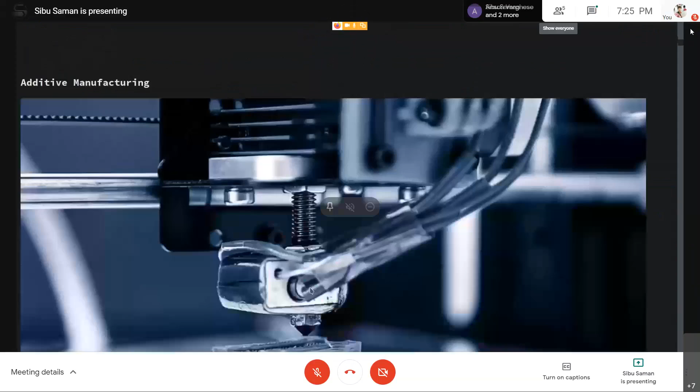Hello, can you hear me? Yes, sir. Audible. And you can see my screen, right? You share it. Okay. Please. Okay, let me know when you share it. Is it visible? Can you please tell me the WebEx? Okay, now can you see? Yes, it's visible. Okay. Let me just check one more because in this. So let me play a sample video. Can you see the video properly, or is it not good? Yes, sir. We can see the video.

Also, you need to enable the audio. No, no, there is no audio. There is no audio. Okay. It's just the video. Okay. And how about the attendees? Like, because we are sharing the screen and then resharing it. So. It's visible, sir. It's clear. Okay, okay then.

I work as a consultant for FAB Foundation. It's an international NGO for supporting installation and training in Fab Labs. So I hope you know what Fab Labs are. They are basically a makerspace for digital prototyping. In Kerala, we have 2 big Fab Labs, and we have about 20 mini Fab Labs across the state. So I hope most of the students in Kerala at least know what the Fab Lab is.

Okay, and yeah, so our session is about 3D printing today, and its application in COVID-19. And since the theme of the event is sustainable future, I will be talking a little bit about that too. Okay, so first I will

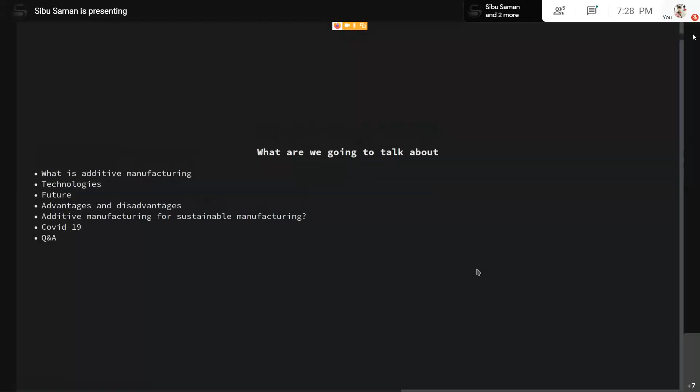So we are going to talk a little bit about additive manufacturing. Then, not in very much detail because we don't have much time, I will briefly cover the most important technologies for 3D printing. Then we will spend a few minutes on where this technology is going to lead us in the future. We will also talk about advantages and disadvantages of additive manufacturing compared to traditional manufacturing, which is subtractive. And we will talk about sustainable manufacturing and applications of additive manufacturing in COVID-19.

Yeah, let's talk about additive manufacturing. While talking about additive manufacturing, we first have to define what it is. This is the classical manufacturing method, which is by subtraction. We remove material. We start with a big block and keep on removing material until we get the final object. So as you can see, this is quite wasteful. We are removing a lot of material. It's fast for one object, but if you want to make thousands or tens of thousands, this is not the method we use. In fact, even 3D printing is not the method we use for mass production, right? We would be using something like injection molding for mass production.

But as you can see, this is wasting a lot of material, especially when you are talking about big, expensive engineering materials, for example titanium for the aerospace industry. We would be starting with a block of metal which weighs hundreds of kilos, which is going to cost a fortune. And then we are going to remove most of it, like 90%, and send it for recycling. That's not ideal, right? We can start from nothing and build it up. This is what 3D printing is about.

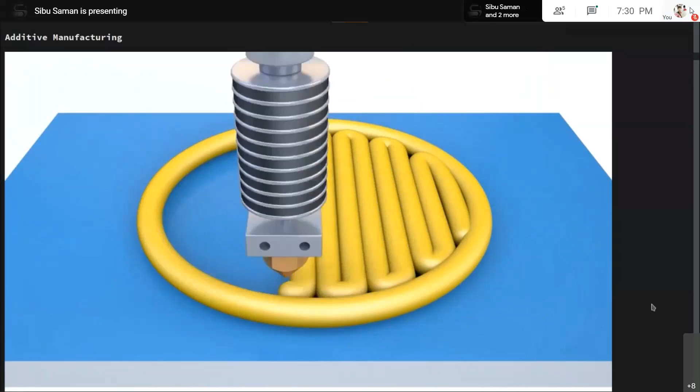So the basic process is you start with an empty bed, and then you keep on depositing material layer by layer. There are many ways. You can deposit by layer, and there are recent technologies in which you can build the entire object in one go, which I will talk about later. And this is what we call fused deposition modeling. We start with a plastic material, heat it to melt it, and then extrude it. The extruder moves in XYZ coordinates, and like this we deposit each layer, and the next layer is built on top of it and adheres to the previous layer. Like this we build each layer and complete the object. So this is the basic idea of 3D printing.

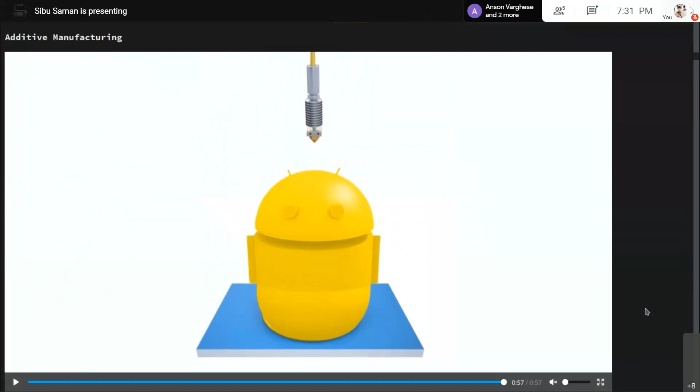So this comes from printing. When we talk about printing, we know what normal printing is, like paper printing. Imagine that the ink on the paper has a thickness, say 0.1 mm or 0.5 mm, and when we stack hundreds and thousands of such layers, we end up with an object which is centimeters or 50 centimeters tall. So that's the basic idea. In fact, one of the 3D printing technologies is actually laminated paper. I will show you one of the videos for that.

Okay, now, how do we start with the design? Obviously you need a design in the computer. You have to design a 3D object in the computer, and then the next step is slicing. Even though it's funny, it's something that is very easy to understand. Each slice of bread is a thin slice of the final bread loaf, right? Each slice has a thickness, and so does the slicer software. So first, suppose we design the model of the bread in the computer, then we slice it, stick each of the slices together, and slowly build up the final shape of the bread. So I will show you one example.

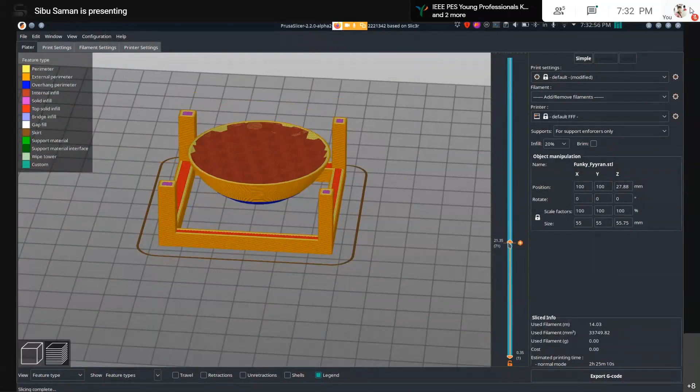With a ball inside a cube. Is that right? Yes. Okay. So this is a design. So basically, a spherical ball inside a cubical structure. So, as you can see, traditionally, this is very difficult to make out of a solid block. I mean, it's very difficult to get into each and every corner and remove the material.

Maybe you can do it by positioning the material in 5 or 6 different ways and attacking it from different angles. Maybe it's possible. Okay. Now, in 3D printing, what we do is we slice it into many pieces. So this is a slicer software. There are many software. For example, this is one web-based slicer. Now this is a Prusa desktop slicer.

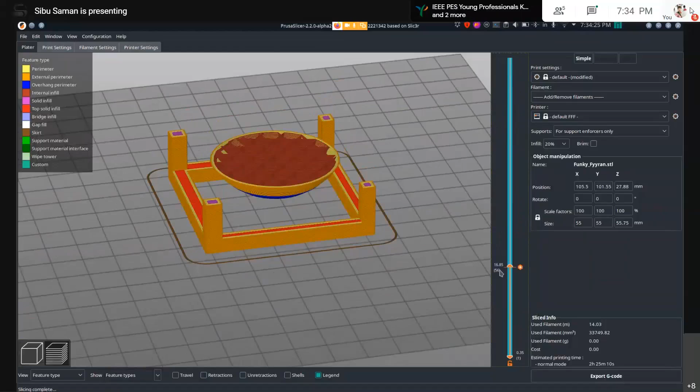So let's slice it, and then you will see that these are each of the layers. So this is how it will start building. So this is the first layer, and then it will print the second layer, and then the third, and then the fourth, and it will slowly build. So this is how we are going to build it. Okay, as you can see, right here, let's say right here. So all the material you can see. Okay, this is the first layer.

It's going to build on the base plate, which is going to be a heated piece of glass or aluminum or something, and then the second layer, and then the third layer. So every other layer you can see is built on top of the previous layer, except for this one, right here. So you can see that a layer is appearing in the middle of nowhere, like it's air. You see there is nothing under this layer.

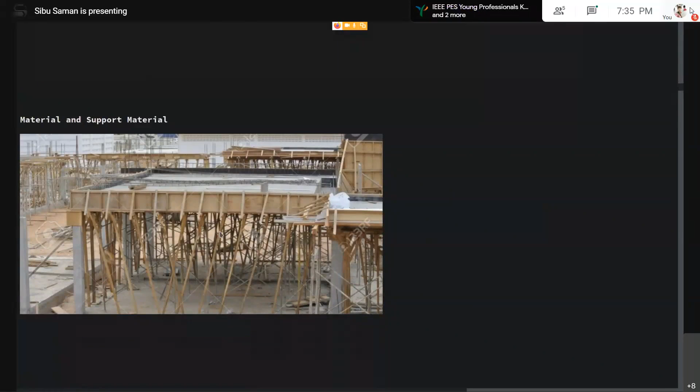So this is where we need something called support material. Okay, so going into the construction field, we know what support and support material is. When we do concrete work, when we do the roof slab, we need support material, right? We will do formwork for the concrete, because we cannot pour concrete in the middle of nowhere; it will just fall down. So in 3D printing, similar.

So what we do is we will go here. By the way, I'm showing this because at the end you will need this when you design your own object and send it to 3D printing. So let's say everywhere, and then I will regenerate it. And then you will see that a new green layer appears, and this is not a layer. You can see the other layers are very dense, but this new layer is not that dense.

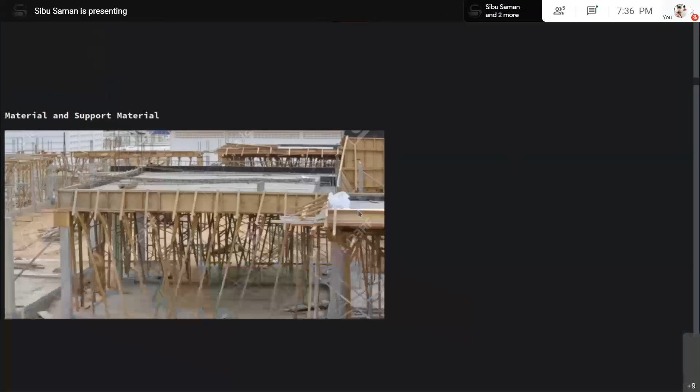So it builds a scaffolding on which the spherical object is then printed. So what happens is, since there is a scaffolding, this spherical object is not going to fall anywhere. And this is also going to give support for this vertical beam, horizontal beam over here. Okay, so let's move up. And now let's talk briefly about the technologies available.

So the most common technology we are familiar with is extrusion. So basically we will extrude material. Okay, and we will extrude maybe plastic. So this is one render where you will start with a plastic material. It could be PLA, it could be ABS, it could be nylon. There are many materials. It could be TPU if you want flexible material. So there are many options.

So this is one animation from Stratasys. Stratasys is a big company, one of the companies that was very early into 3D printing. So as you can see, this is depositing the material and then the support material. You can see that there are two materials with two different colors. This white is support material and the black is actually the object we are printing. This is the one we need, and we will later remove the white portion.

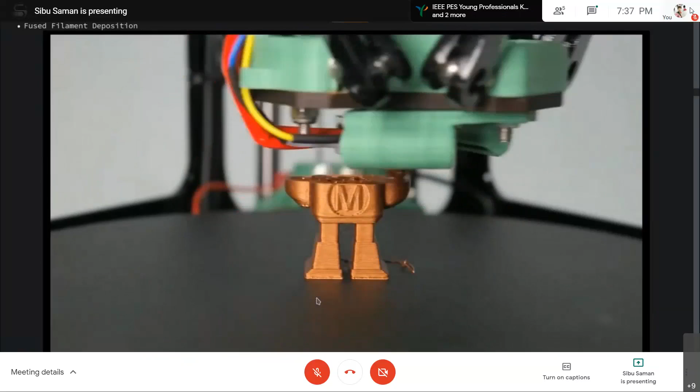So you can see that we are removing support material, we do some post processing, and we will end up with a very nice material. And now I will show you another time lapse. It's another render, similar technology.

And now when we talk about 3D printing, we usually talk about plastics and sometimes metal, sometimes ceramic, sometimes concrete. So this is another material which we don't usually consider for 3D printing. This is glass. You can actually print in molten glass also.

Technology is the same, just the machine is going to be a bit more complicated to handle the heat of the glass. So this is the same technology. We are going to print, deposit the glass, molten glass, layer by layer to develop the final object.

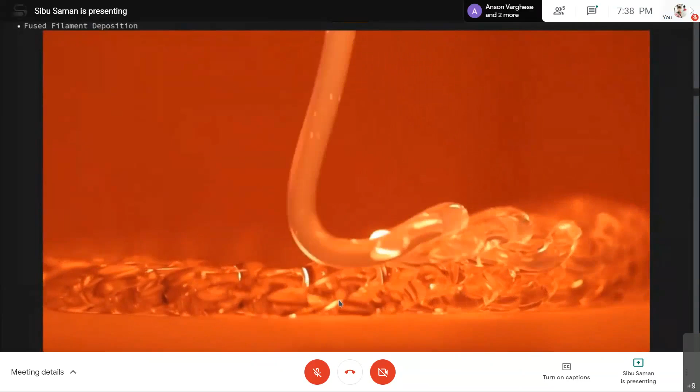So when we talk about the history of 3D printing, I don't want to spend a lot of time on it. This is not a history lesson, and it's not going to be very interesting. But we all think that 3D printing is a new technology which is revolutionary, but the fact is that 3D printing has been here for a long while, at least since the 1970s.

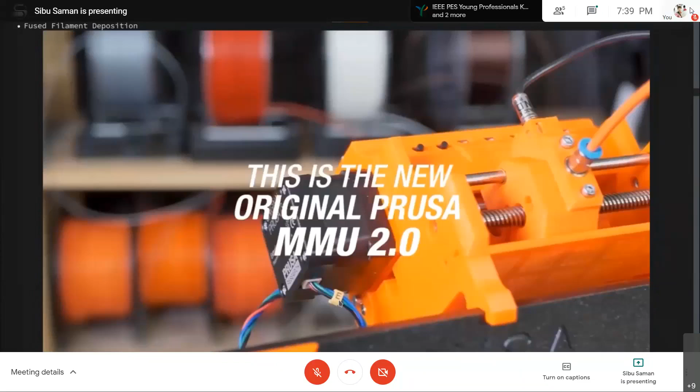The problem was that all the technology was proprietary with license to only a few companies. They weren't ready to share with anyone. And recently, since around the 2000s, many of the patents got expired. And then a lot of private researchers and independent universities could start working on the 3D printer, researching and developing and creating new technology, new machines. So this is what happened.

So 3D printing is not a new technology as we see. Some of the methods are actually new, but the technology itself is very old, we just didn't have access to it. It was only accessible through multi-million dollar machines from big corporate companies.

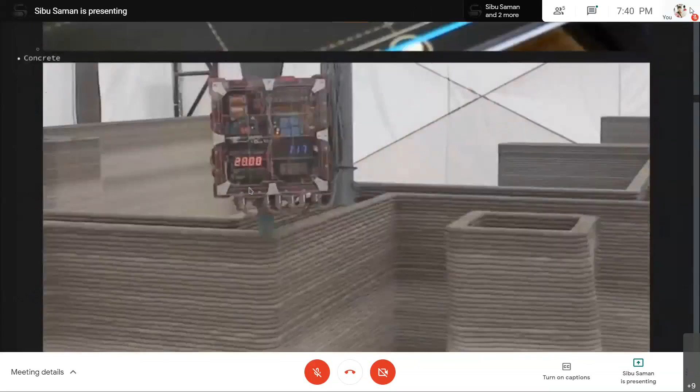So this is another extrusion based 3D printer. As you can see, this is a concrete 3D printer. This can be used to make housing colonies, houses, buildings, and other structures. And this is just another video. He's building a statue of himself, and the sand here is the support material. Similar to the one before, where they were using a different type of plastic as a support material, here concrete is the main printing material, and the sand is the support material, which can be easily removed later on.

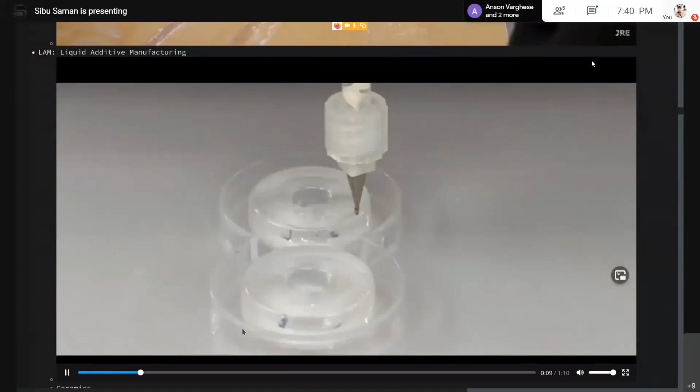Okay, and another technology is liquid additive manufacturing. It's similar to the one before, but instead of a solid object which we turn into liquid, we start with a liquid. So this is a silicone material, this is ceramic material, but this is not hardened immediately. The silicone we will have to vulcanize, and the ceramic we will have to bake in an oven for full strength. Okay, and then moving ahead.

So now we are going into a different type of technology. Remember I told you this is not exactly 3D printing in a different sense. You can see that at any given instant, we are processing only one pixel, one dot, and that is one dimension, right? We are not creating one line at a moment. At any given instant, we are only generating one dot. So we could say that this is

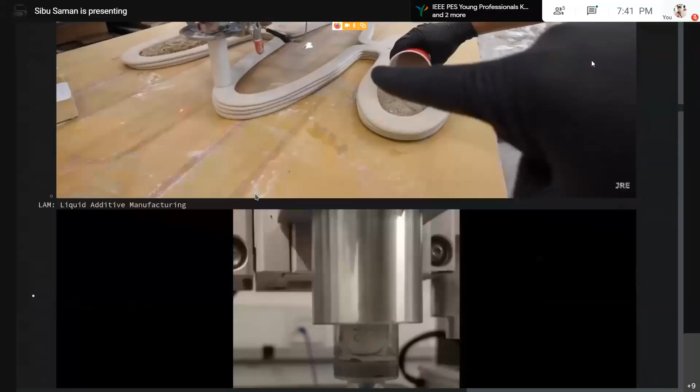one-dimensional printing. Now we will go into something called PolyJet, and this is actually what I would say is 2D printing. The reason is it's very similar to an inkjet printer, except that we are depositing a lot of ink, which has thickness. Basically the head is that of an inkjet printer, so the technology is the same. You can see that it's spraying droplets, and each drop has a thickness. The ink is a UV curable resin.

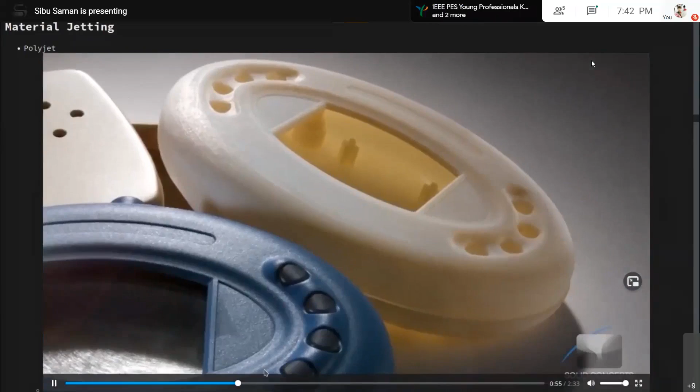So they will deposit a layer, and when they pass, you will see there is a blue light, which is actually UV light. It will cure that layer immediately, and then the next layer will be built on top of it. The reason why I am saying that this is two-dimensional printing is we are not processing one dot at a time. In fact, we are processing a line at a time.

So this is actually one-dimensional printing. Sorry, the one before I made a mistake. The one before with a dot would be zero-dimensional printing, and now we reached one-dimensional printing. So we have a line. We will be printing a line at a time.

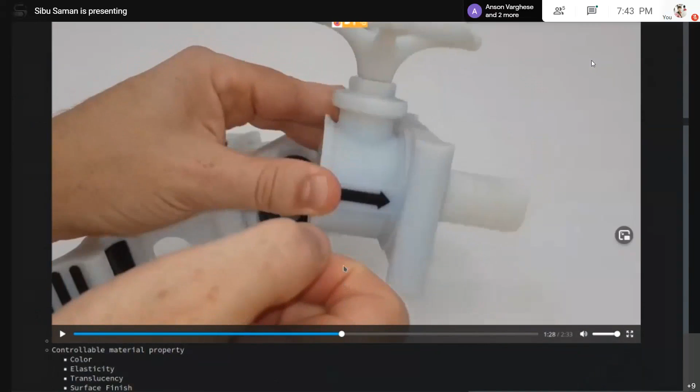So this technology is very versatile. Since we are using liquid resins, we can have different types of resins. We can have flexible resin, we can have very rigid resin, we can mix in colors. So this technology can actually print in many different colors. You can have flexible, rigid, transparent, or conductive materials. You can modify the property as you wish.

It's a bit expensive. The machines are a bit expensive. For example, the printer we commonly see, this one, you can buy for around 50,000 rupees, or under 1,000 US dollars. These machines will go up to $50,000. In fact, one of the machines from Stratasys is about $500,000. So these are very expensive machines, and it doesn't make sense for the maker space to have one.

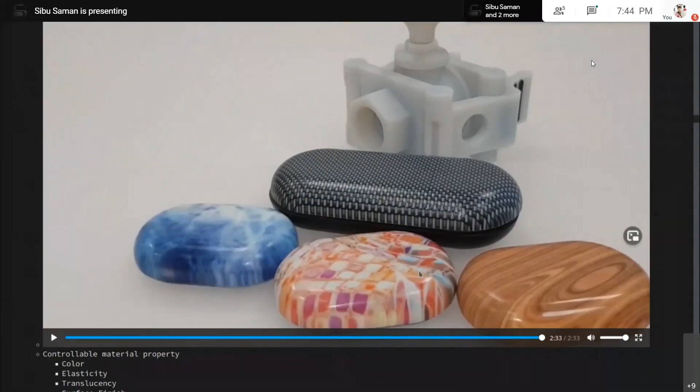But it can do a lot of things. It serves the medical industry, it serves prototyping for big companies and all. So there are many uses for this. In fact, you can see this valve here is printed as such with a rubber gasket. You don't need to assemble it. It's printed, you take it out of the printer, do some post processing, clean it, and then you get a fully functional part, with all the movable parts, all the seals, everything. So that's something very interesting about this machine.

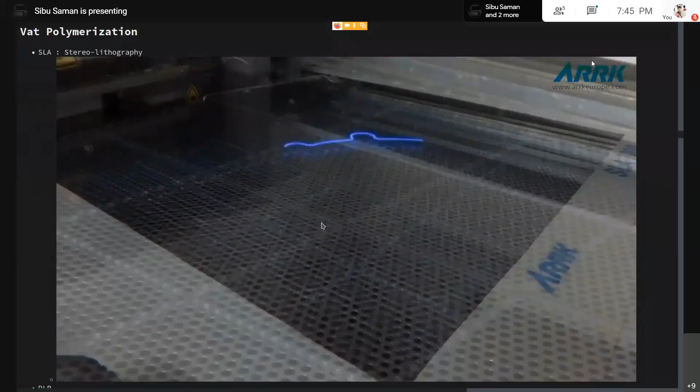Now, the next tech is vat polymerization. This is where we actually get into 2D printing. Not at the moment, but I'll tell you. Vat polymerization is similar in the sense that it uses the same material as before, a photoresin which reacts to UV. When you expose it to UV light, it hardens. So this is a bath of UV resin, and we expose it selectively, and then the bed goes down. A new layer of resin appears on top, and then it is exposed again. So slowly we build each layer.

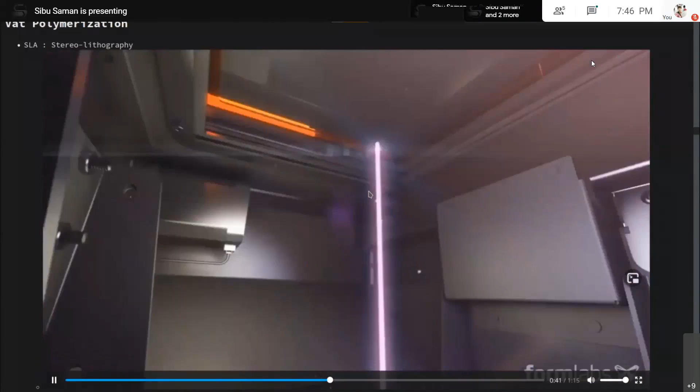And now this is a small desktop printer, around $3,000 US, from a company called Formlabs, and you can see what happens. There is a laser beam, and scanning using 2 galvos in the X and Y direction, and then the bed moves. In the previous machine, it was going down into the resin. Here it's going up. That's the only difference. Basically the process is the same. You expose one layer, build one layer, and then the build platform lifts up to bring new uncured resin to the bottom, and then it's exposed again.

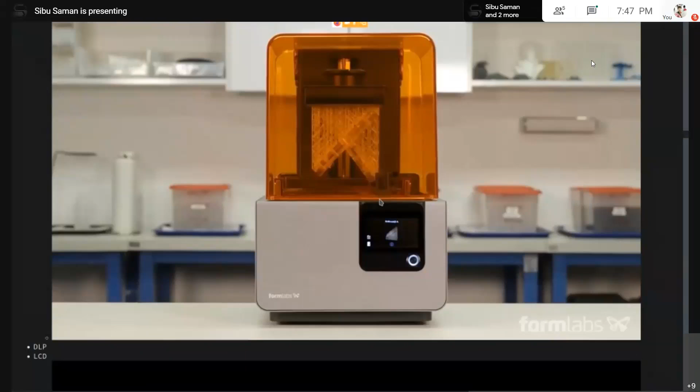All this webbing you see is support material. You can remove it later. So this is called SLA, the stereolithography process. And as you can see, this is very slow. Again, this is one dimension, or zero dimension. You are processing one dot at a time.

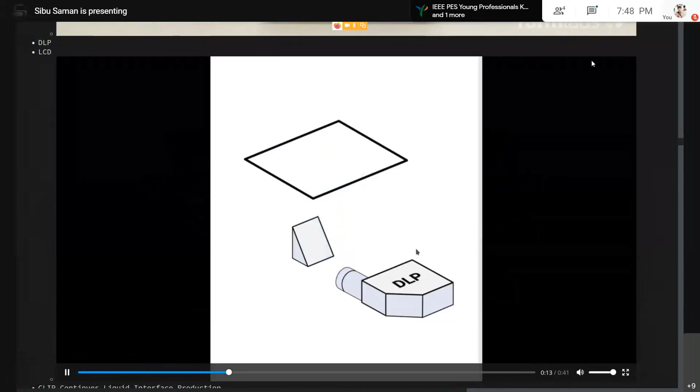Now let's see this one. The one we saw just before uses a laser, but you can also do it using LCD and DLP technology. Instead of generating the layer line by line, we generate the entire layer at once. It's similar to projector technology. In fact, it's actually a projector inside, but instead of visible light, we use UV light. DLP exposes the entire layer, just like a DLP projector, and LCD also exposes the entire layer, just like an LCD projector. A DLP projector uses a micro mirror device, and LCD, as the name implies, just uses an LCD.

Laser machines have very high resolution. DLP has okay resolution, high enough for most common jobs, but it's kind of expensive. LCD is very cheap. LCD panels are very cheap, but they don't last very long. The material inside the LCD is very sensitive to UV light itself, so it's not going to last very long.

So it's similar to the DLP or LCD projector. In fact, they use a DLP, but the difference is in how it is being printed. The difference is in the chemistry. So you can see this is very, very fast. This is only 2 minutes, 3 seconds. Now this 3 minutes. It's very fast.

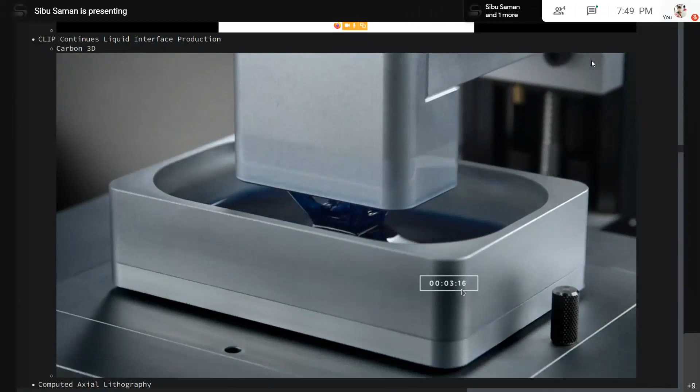So I'm not going into depth of this technology. It's called continuous liquid interface production. You can search about it. It's marketed by a company called Carbon 3D. So basically, it uses a special resin which is sensitive to UV. At the same time, it will not react in presence of oxygen. So they have a special membrane underneath which is permeable to oxygen. So when they expose it to UV, it's not going to cure.

So like you can see here, the build platform and the tray in which the resin is kept are actually in very close contact. So when you expose the resin to the UV, it will adhere to the layer before and also the tray. So you have to lift it up and then you have to expose it to the new uncured resin. That's a problem.

Since the membrane is permeable to oxygen, the resin very close to the membrane is not going to cure even when exposed to UV. That's how they do this printing very fast, because they can continuously lift the print, and as they lift, the new material will be seeping into the cavity.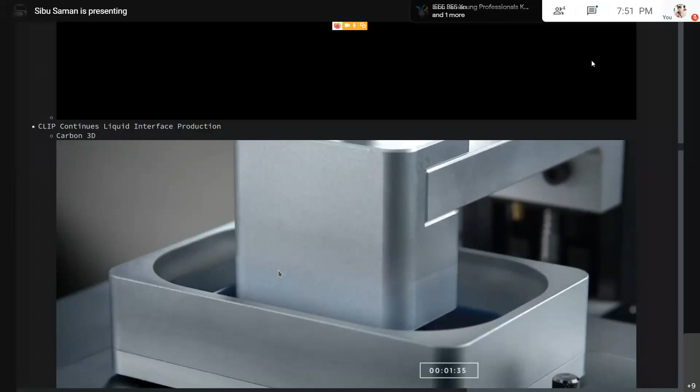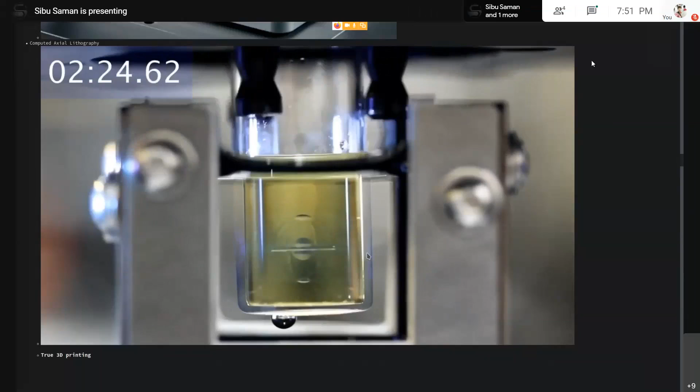Now, we have seen 0 dimension, 1 dimension, and 2 dimension. Now this is the real 3-dimension printing. Okay, so this is similar to a CT scan or an MRI scan. So this is very advanced technology. This is not very easy to understand with common sense. So as you can see, the entire object is getting developed in 3 dimension in real time.

I mean, we are not generating one layer at a time. We are not generating one pixel at a time. We are generating the entire object at once. So this is like the replicator in Star Trek. The entire thing is getting exposed and developed at a single go. This is very interesting, as you can even have material inside. So this is a screwdriver.

So you can see that this object is developed all at once. And this is a screwdriver with a metallic bit inside, and the material is being printed around it all at once. So this is a computational process.

What we do is, this is similar to the previous technology, but we have a projector and a photocurable resin. In fact, the photocurable resin is very high viscosity, and the hardened object is going to be of similar density to the liquid. So when the exposed resin hardens and the print develops, it's just going to stay in the middle of the liquid, and it's not going to fall.

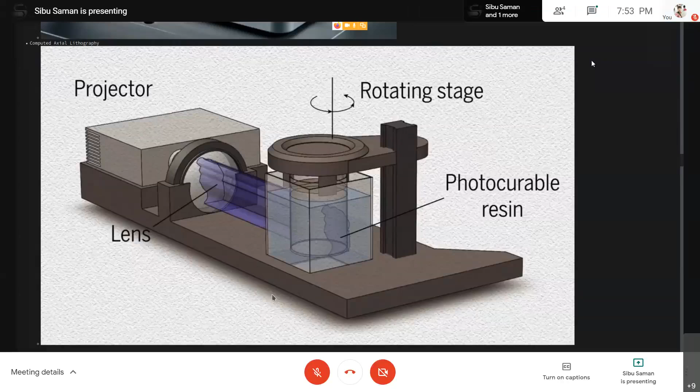So yeah, you can see this is printed in the middle of the liquid, and it doesn't need any support material because it's not going to fall. It's the same liquid, same density. So the idea is, we are going to expose it, rotate it, and expose it with the different images as viewed from the sides. So it's a somewhat complicated computational process. And so this is the real 3D printing. We are printing the whole object, in 3 dimensions, at once.

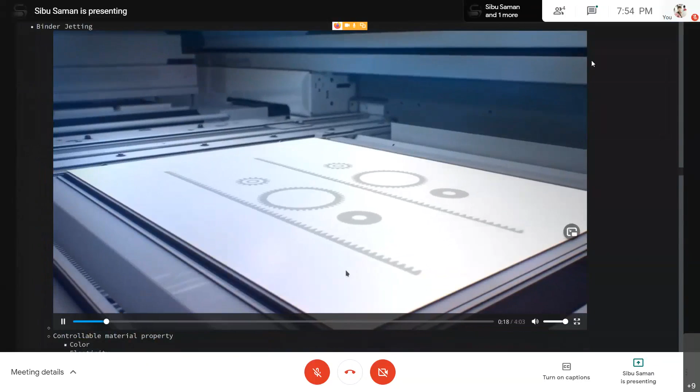Okay, now another technology is, we start with a powder, and then we spray material which will glue the powder together. We can print metal, plastics, nylon, ceramics, we can even print sand, a lot of materials using this technology. So we start with a bed of powder, a layer of powder, and it's similar to the polyjet printer, but instead of the material, we are actually spraying some kind of glue, which will bind the powder.

And similar to polyjet, we can have a lot of control over the material property. So there are two materials, you can see: fusing agent and detailing agent. Using these two, especially the detailing agent, we can control different properties like color, elasticity, translucency. We can even have a conductive detailing agent, so we can have a conductive final object.

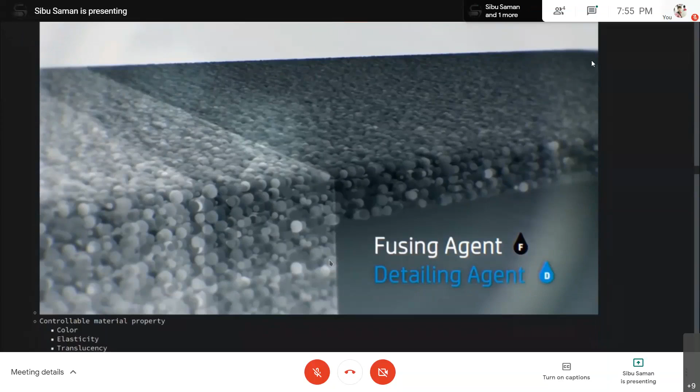And this is another machine which is actually printing in sand using sodium silicate. Sodium silicate is liquid. We commonly call it water glass. And when we expose it to carbon dioxide, it becomes solid. It's just going to be silica. Okay, so you can see this is a mold for casting metal. So the mold is actually printed.

Sorry, the rest of the video is not working. Sorry for that.

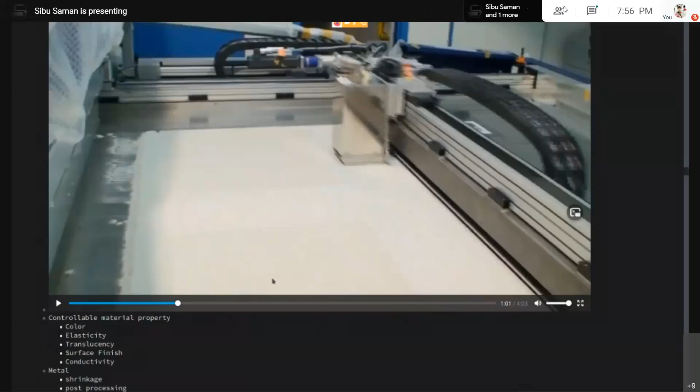So this is the mold for the metal casting, and this is commonly used by automobile manufacturers. This is how they are going to cast the engine blocks and everything.

Okay, and also this technology can be used for printing metal. So how they do it is you start with a metallic powder, and then you print a binding material, which could be starch or something. But then this object is not going to be very hard, so you have to put it in an oven, in a furnace, for either sintering, or you have to impregnate it with

another metallic alloy. For example, if you are printing in steel, you can impregnate it with bronze or brass. So this brass material will diffuse into the print. It will adhere. It will make the final object very hard.

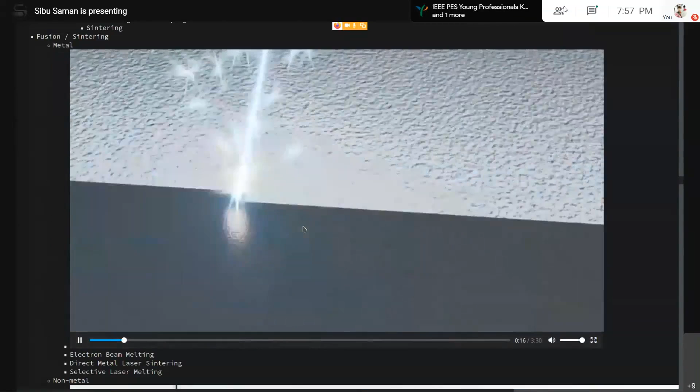This is another technology. What you are seeing over here is a metallic powder, and instead of jetting a material like a glue, there are two different ways. You can either use laser or you can use electron beam. So we use this electron beam or laser to sinter the material or melt the material and bond it together.

So depending on whether you use electron beam or laser, or whether you are melting the material or just sintering it, there are three different technologies: electron beam melting, direct metal laser sintering, and selective laser melting. So there are three ways you can do it. All three technologies will look almost the same. There are just some minor differences.

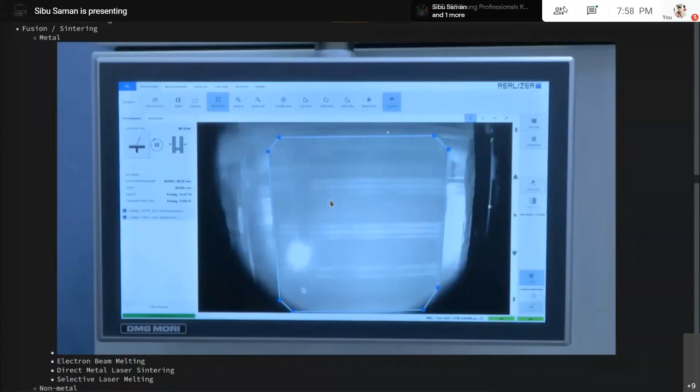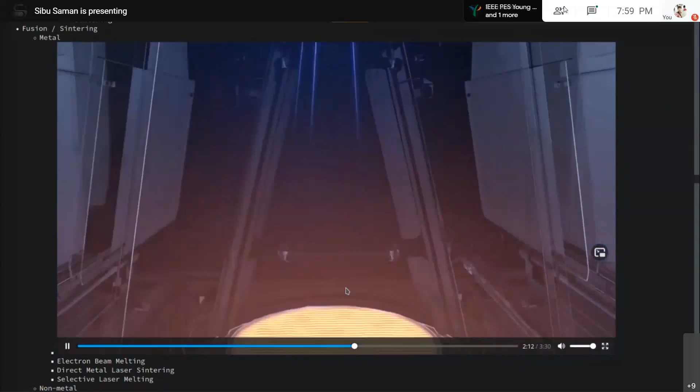Now this is selective laser melting, and as you can see, this is very similar to selective laser sintering. There is not much difference here. And the electron beam process is slightly different. The bed and everything will look the same. You use the electron beam to melt the metallic powder and fuse it together. And this is done under high vacuum and inert atmosphere.

You can actually build a lot of very complicated material using this technology. You can see there are very complicated structures, which are very hard to create using traditional manufacturing processes like CNC milling or machining. Complicated material designs you can actually print.

So this is another process, but instead of metal, it uses plastics. This is a sample created by one of the affordable laser sintering machines, which is called Fuse 1 from Formlabs. They use nylon material and they use a laser to selectively fuse the material.

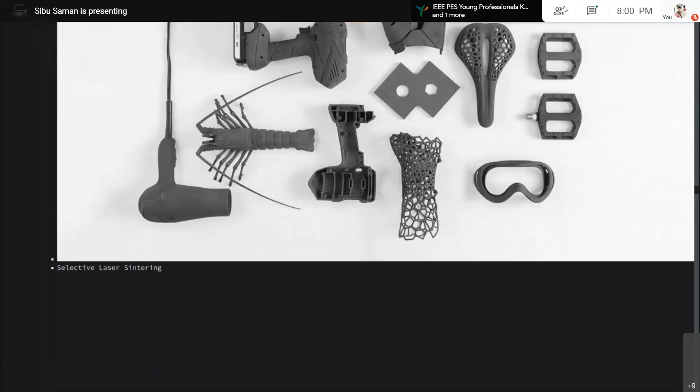And now we'll talk about a few other technologies. When we talk about printing, we usually don't consider this as 3D printing. But in fact, this is also 3D printing. It's just that instead of concrete, we are using bricks to create material. So this is also kind of 3D printing. You can consider it as 3D printing.

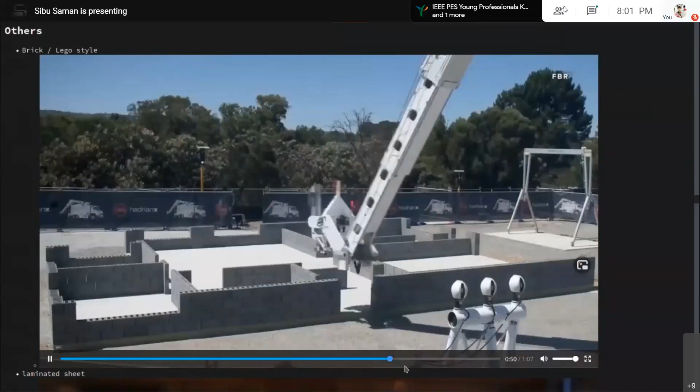This is an animation. And this is the real machine. It's building a house brick by brick. So even though we don't consider this a 3D printer, it actually is.

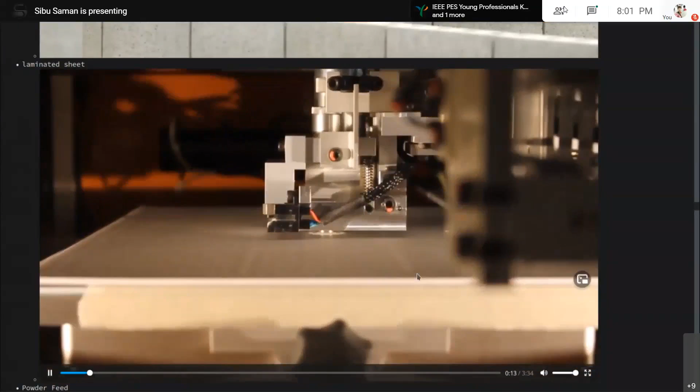And remember, I talked about laminated paper. So this is a printer. It creates the object paper by paper. It puts down a paper, bonds it, and now it's going to cut it. It binds each paper to the previous one using a particular pattern of glue, cuts the material wherever you don't want it, and then the next layer is built on top of it. So it's paper by paper, and this is the final object.

And we remove everything, and you see that this is in color, and the reason is that since it is paper, along with the glue, you can also have a normal inkjet head, which can print the color you want.

And this is another laminated sheet process. It's called ultrasonic consolidation. Instead of paper, we use metallic sheets, and we bond the metallic sheets using ultrasonics.

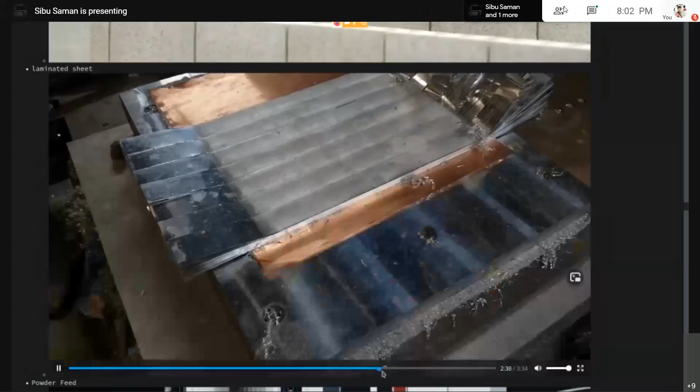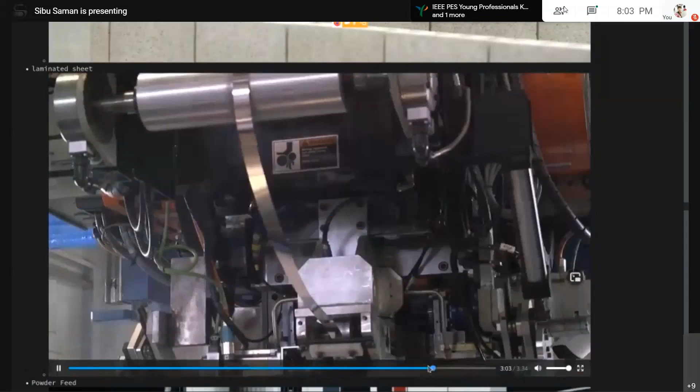So you can see that each sheet of metal is bonded to the previous one using ultrasonic energy. It basically disturbs the oxide layer, and a solid adhesion forms. Other than that, this is very similar to the previous technology, printing using paper. Just the method used for adhering the metal is slightly different. That's all. The technology is basically the same.

And now this is a different kind of 3D printing. What you see here is a jet of metallic powder. We inject a jet of metallic powder into a laser, and it immediately melts and fuses at the spot. It's similar. I mean, except the method for creating the molten metal, this is very similar to fused deposition modeling from 3D printing.

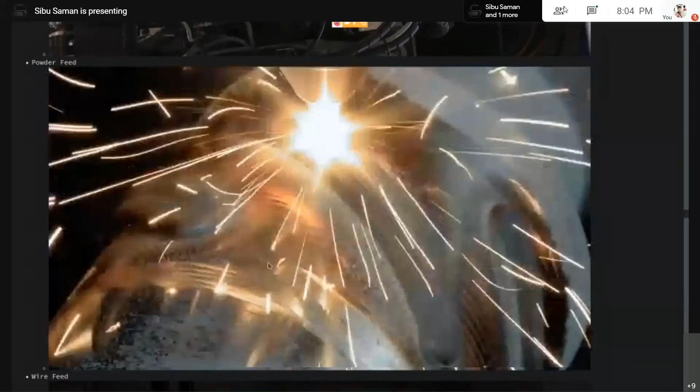So this kind of printer is what we call a hybrid machine. It will have traditional machining capability as well as 3D printing capability. So it creates the object, and then it does the final surface machining. We don't have to start with a big block of material.

As you see, the material removal is very minimal. The material wastage is very minimal. We are not starting with a big block. We are actually approximately printing the rough material, and then removing only maybe 10% of the material.

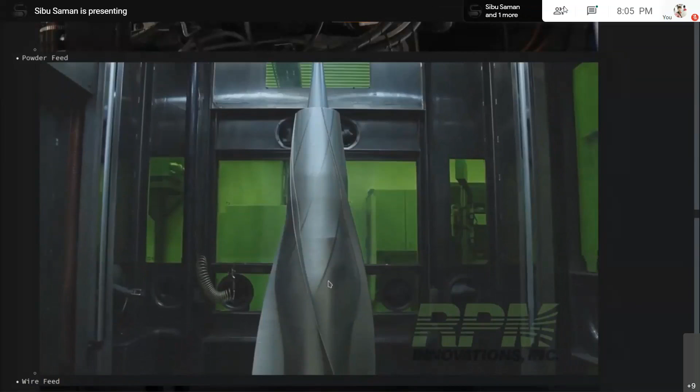This is another version of it. It's actually printing honeycomb triangular patterns. It created a shell and it created this honeycomb pattern around it for external strength. I will talk about this later. This has an interesting property.

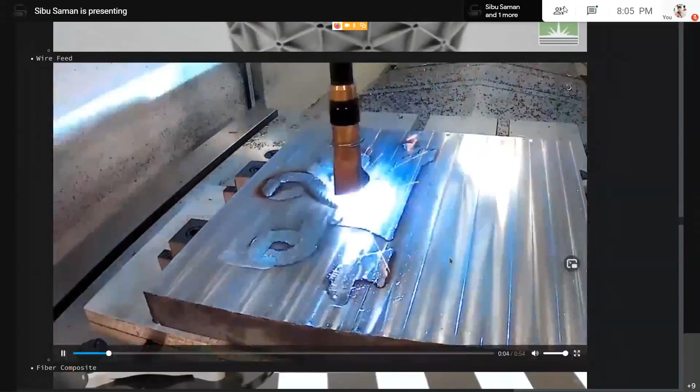And this is another technology. As you can see, this is very similar to welding. It's just a MIG welding machine on a 3-axis CNC machine. So it's generating the final 3D part layer by layer using the MIG welding torch, and then the final finishing process is going on.

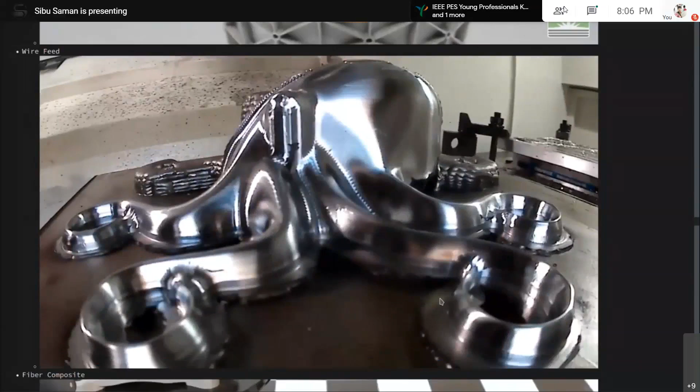So as you can see, there are many different ways of 3D printing. It's not something very new or a very advanced technology. All these things are, you can see, very simple technology. We had these technologies before. We didn't have the right to use them, because the rights and the patents were with the corporates. That's the only difference.

And this is another method which creates plastic fiber composite materials. This is glass fiber, and it's extruding glass fiber along with the UV curable resin, and it's bonding right then, and it's creating the final part.

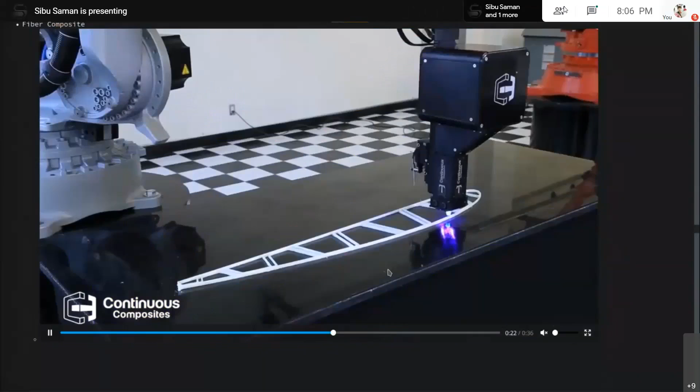So these are all the different types of technologies for 3D printing, and there are even more technologies. I'm not going to cover all of them in detail. This is just the general introduction to the available 3D printing technologies. So any doubts so far before going ahead?

Hello. Hello, sir. Sir, there was a question in the chat box. I'll read it out. Here's a question from Mr. Jayakrishnan. What material would you recommend for watertight enclosures which need to withstand pressure of a couple of bars?

That question is a bit complicated in the sense that it's not just dependent on the material, it's also dependent on the technology we are using to print it. If you are using a traditional 3D printer like an Ultimaker, one of the fused deposition, plastic filament based ones, it's very difficult to make it watertight. You will have to print it, and then coat it with some kind of epoxy or polyurethane based resin to make it watertight. By nature, that printing technology is porous.

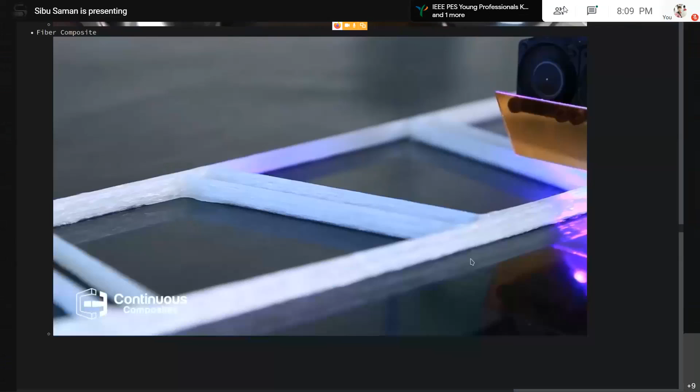Basically, you will get software with each printer. Each printer will use its own software. And there are a few 3D printers which use a common software. So either you can use, okay, let me post it in the chat itself. Here.

You can use either Ultimaker Cura or, so the software I used is Slic3r slicer. That's the software I use for slicing it. And depending on which printer you have, you will have different software.

And in fact, if you just want to try it out, you can use this particular software. I will also post the link to this in the chat. This is a web-based slicer software.

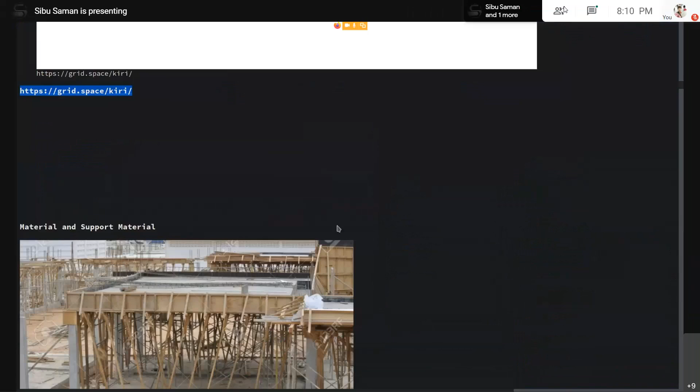Yes, sure. So there's one more question from Avinash. In normal 3D printing, the layers are visible after finishing the project and the finish is not 100% good. Is there any technology to print the object without that visibility of the layer while printing itself?

One of the options is to make the individual layers very thin, and then you can slightly sand it or buff it, or there are a few different post-processing methods. For example, you can reheat it. If you are printing in a normal 3D printer, you can put this object, cover it with fine sand, and then heat it to about 200 degrees. Then these layers will disappear.

And if you are printing in ABS, you can use what is called an acetone bath, and then also you can make the layers invisible. But another thing you can do is, if you are using a resin 3D printer, usually the resolution is really high, so you won't see them.

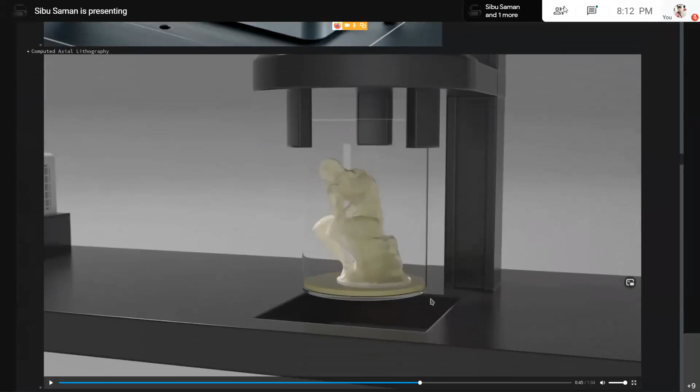The printer over here, what I told you is the real 3D printer. It's called computed axial lithography. The technology is not yet commercially available, but the final object from this printer doesn't have these layers, because we are not printing in layers. We are building the entire object at once. So yeah, this is the only technology right now which doesn't have the layers.

Before moving ahead. No, sir, no. Hello? You may continue.

Okay, so now let's see what's going to happen in the future with 3D printing. I'm not an expert in this. What I'm going to say from now onwards is basically my opinions and my views based on the experience I have. So you have to take it with a grain of salt.

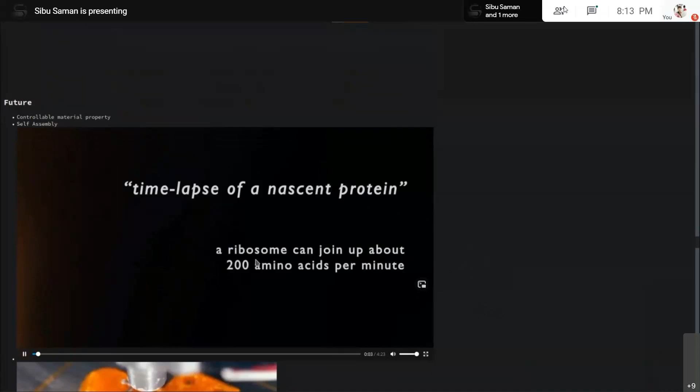So this is not a 3D print. This is not a human-made 3D printer. This is in nature, and this is how we were created. We were 3D printed using proteins, and the building blocks for these proteins were amino acids. There are a couple of types of amino acids, and they were printed using ribosomes. So you can say that we were actually 3D printed like this.

The interesting fact is that even though every protein is created from basically 20 to 24 amino acids, every protein is different. It does a completely different thing, and the functionality of these proteins comes from the shape of the protein.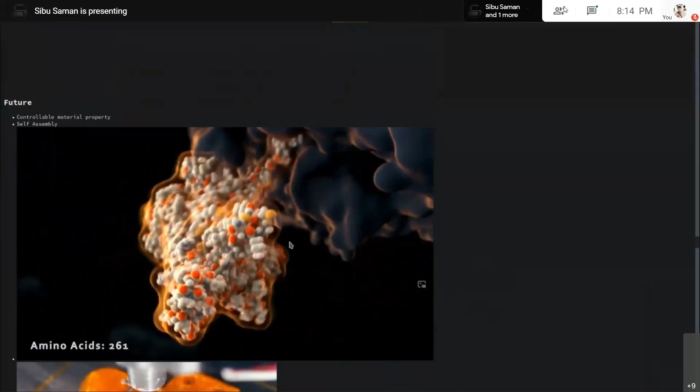Okay, and the reason I'm showing you is this is another one we are creating. What we are trying to do in the future, I think, is mimic nature in 3D printing. We are actually utilizing the material properties, which we can call a fourth dimension. So along with the three physical dimensions, the material property is the fourth dimension.

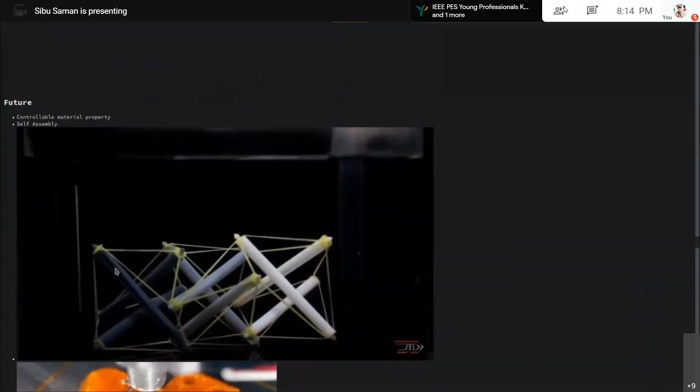So we are printing materials which behave differently in different scenarios. For example, when this material is exposed to temperature, it takes a final form. So this is like protein folding, right? You start with something, expose it to temperature, and then it takes the final form. And even our proteins are the same. When you heat the protein, it loses its function. It just becomes a long strand of amino acids. And when you cool it, it folds back to its final shape.

So these are all 3D printed innovative technologies. This is what I mean. These are the new developments in 3D printing, not the ones we saw till now. We are into material science and we are altering the material properties. It has very interesting properties. So this is a magnetic material.

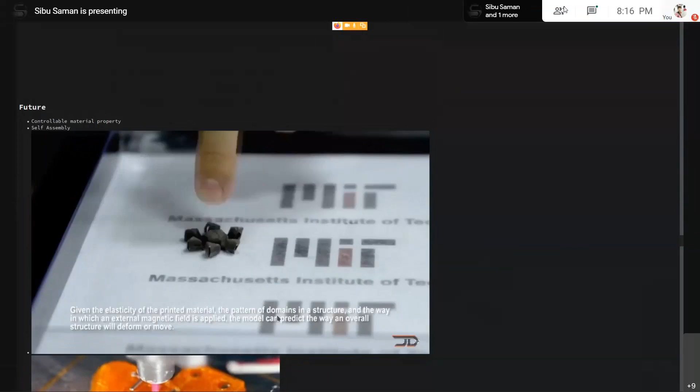So we are only changing the magnetic field, and this tiny robot is behaving. You can make it crawl across the surface. You can make it walk. You can make it hold a material. You can make it release a material. Yeah, see. So this is what I think is one of the futures of 3D printing.

This is another upcoming technology, where you can have a 3D print with embedded electronics in it. Even though I don't know when it's going to be possible, or even if it is going to be possible, maybe there will be a future where we can just print a mobile phone, working fresh out of the printer.

It could happen, we don't know. So this is something like that, I mean, very close to it.

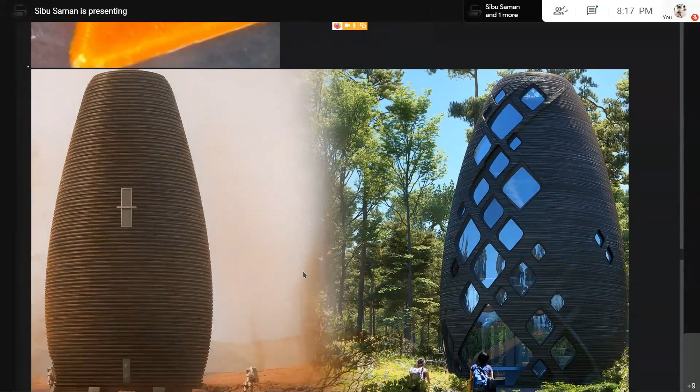And we use the 3D printer, for example, a concrete 3D printer, for creating houses, right? And we are trying to colonize Mars. We are trying to colonize the Moon. We are trying to go back over there, and there is no way we can take a big house or construction material over to Mars or the Moon. We will have to use what is available on Mars or on the Moon, and what is available over there is a lot of sand and a lot of rock. So you will have to use that to 3D print your own houses.

And we already started creating rocket parts. We have already started creating aerospace parts, a lot of things for these industries, and they're very efficient. What you see here is this internal structure. There is no way we can create it using traditional manufacturing methods. This is only possible through 3D printing, nothing else.

And we started exploring bioprinting. For example, we can print organs or prosthetics. So this is another area we are actively researching. What you see here is a scaffolding of an ear using a biocompatible material, and then infusing it with real human cells. And then it becomes an organ which is ready to be transplanted into the host.

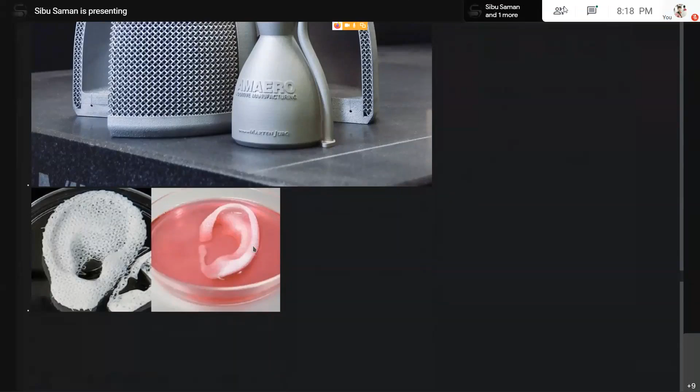And on to this: not the Terminator, but it's going to happen. What we will end up in is self-replicating machines, so 3D printers that can create 3D printers. For example, one of the 3D printing groups is called RepRap, Replicating Rapid Prototyper. They were the pioneers in making 3D printing technology open source and massively available. Their objective is to create 3D printers using 3D printers, and those 3D printers will create another one. So it basically becomes exponential growth.

For example, the company Prusa creates a lot of 3D printers, and many of the parts for their printers are actually printed using their own printers. So it's kind of interesting. And let's see, what are the advantages and disadvantages? One of the easiest things I'll tell you about is the material wastage I talked about.

So this is a part, right? It's the side panel of a rocket. You can see that it started with a very big block of aluminium. Maybe it weighs thousands of kilos. They wanted the rocket to be a very thin shell, right? You don't want a rocket to be made out of solid aluminium. So the rocket has to be very thin. And if you make it very thin, just like sheet metal, it's going to collapse because sheet metal doesn't have a lot of strength.

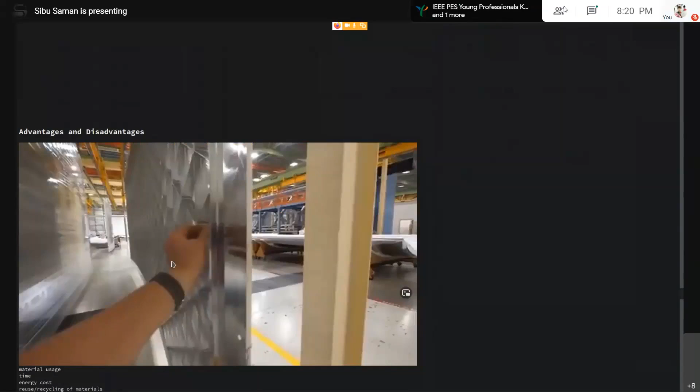So what you do is create these ribs, by milling. You start with a solid block of aluminum, and then you remove the material to create this. You start with an aluminum block which weighs several thousands of kilos, and then you end up with a panel which weighs hundreds of kilos, but has a lot of strength. So basically, you will be removing like 99% of the material, and this is very wasteful and very slow. And see, these are the parts required for that.

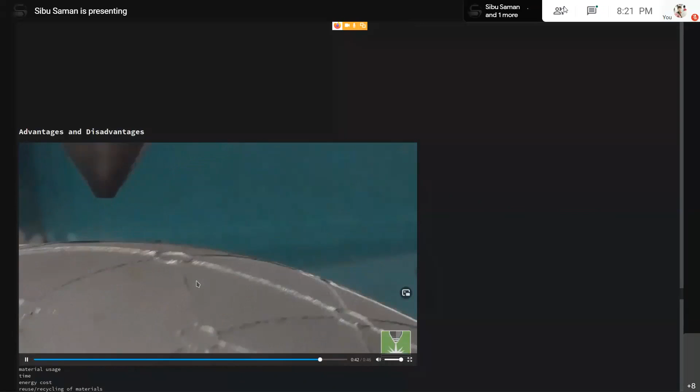And this is 3D printing. We saw this video before. It's creating a similar pattern. See, they are creating a similar honeycomb, these webbings, these ribs, but instead of milling it out, they are actually printing it. So you don't waste material. In fact, you are only using the material you need, and it creates the same part. And I think it could even be very fast compared to the other one. This will have the same strength as before. So this is where the advantages are.

So with 3D printing, material usage is one of the advantages. Sometimes you will save time, because if you see something like this, removing this material and transporting this material is very time consuming. Generally speaking, 3D printing is slower than other technologies, but there are occasions where you will save in time, shipping and transportation cost, and a lot of aspects.

Sometimes, if you are a company and you want these materials, you will not have the manufacturing facility in your company. You will need some other contractor to make it and ship it over to you, and that will have a lot of time and cost involved.

But if you have a 3D printer, you can make almost anything, almost any parts you need. And another advantage is, many of the machines and many of the assembly lines, for example, you take a car, or you take one of the machines in our house, use a lot of nuts and bolts and a lot of individual parts, and then they are all put together. And one of the reasons why we had to do that is we cannot make it as such, because traditional milling methods or traditional manufacturing processes cannot reach inside of the object and create that material. But 3D printing can do that.

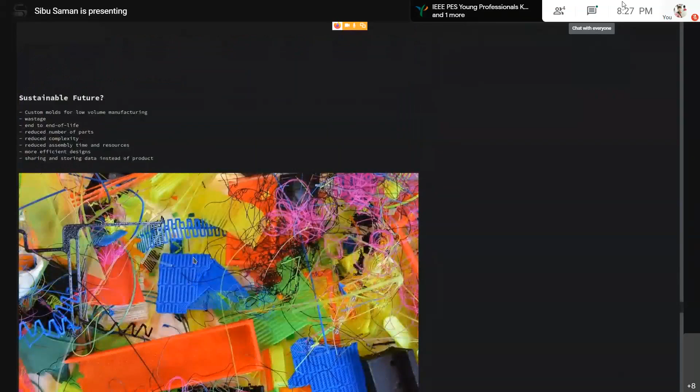So sustainable future is very much related to this topic over here. We generally have a belief that 3D printing is less wasteful and it's good for sustainable development or sustainable manufacturing. I agree, but I don't fully agree, because when done correctly, 3D printing is very good for sustainable manufacturing. You can actually recycle most of the material. The material wastage is very minimal. Even the wasted material can be recycled.

You don't have to ship big parts from all over the world to a single manufacturing unit and then assemble it. Instead, you can assemble all the parts in-house. So there are many advantages in terms of sustainability. Very efficient designs cannot be made using traditional methods, and just because of that, our energy efficiency is not very good. But we can use the 3D printer to have very efficient designs.

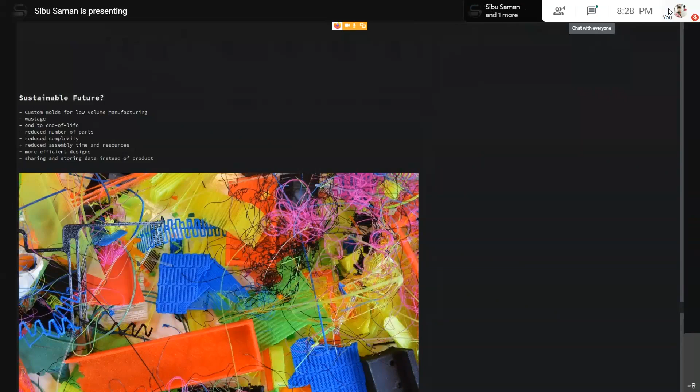Those are really good for sustainability, but then there are disadvantages. For example, if everybody has a 3D printer in their home or in their nearest makerspace, as an individual user we don't care much about sustainability or reuse or recycling, and we end up wasting a lot of material and throwing it into trash bins, and they end up in landfills.

On an industrial scale, it makes sense to recycle each and every component of 3D printing, not just the 3D printing material, but also all the post-processing material. Suppose you use solvents, support material or chemicals for post-processing. On an industrial scale, it makes sense to recycle all of this. But as an individual user, or a small makerspace or a small fab lab, we usually just throw it out.

And when 3D printing technology becomes available to everyone, this problem is going to be a lot bigger. In fact, I'm sure that out of the 20 3D printers we are going to do for you, many of them are going to be used for souvenirs or models of cartoon figures or figurines, something not really useful. So this is a problem. But I think it's just because it's a new technology and people don't know what to do, and maybe in the end we will fix it.

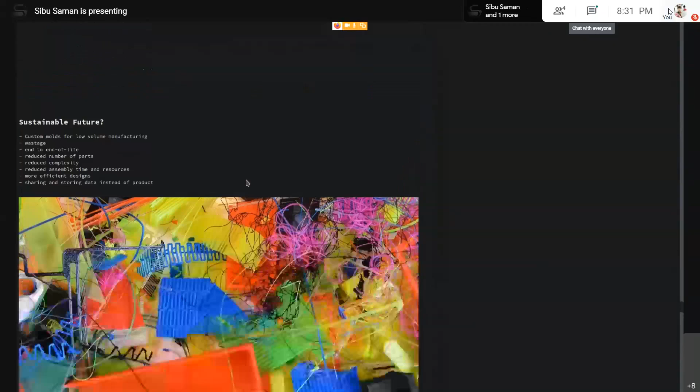For example, Apple recently launched the iPhone 12, and they say they are using a lot of recycled material. In fact, they say this is one of the most sustainably created iPhones. But at the same time, they are against repairing. They create their phones and laptops so that it's very difficult to repair them yourself. And you will end up throwing away your phone just for a broken display or a broken charging port. This is against what they are saying.

Apple is saying that they are for sustainable development, but at the same time they are actually destroying it. So it's up to the manufacturer. 3D printing technology has a lot of potential, but at the same time, if not used correctly, it's going to be very disastrous.

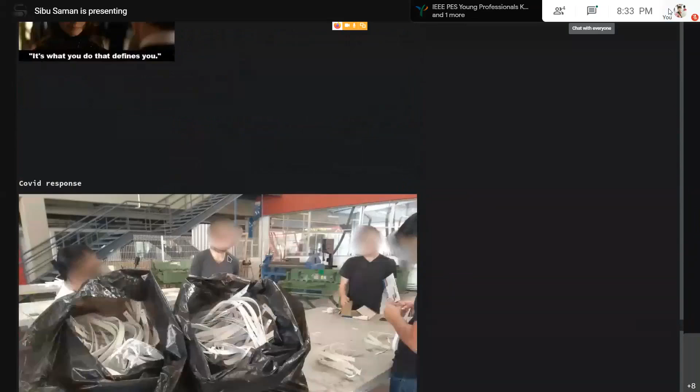Coming to the COVID response. I told you 3D printing is not for making millions of parts. One of the immediate responses during the COVID crisis was that everybody was creating face shields and masks. This is not really sustainable because 3D printing is very slow and it takes a lot of energy. Each one of these face shields might have taken at least 10 or 20 minutes to print. That is a lot of electricity cost.

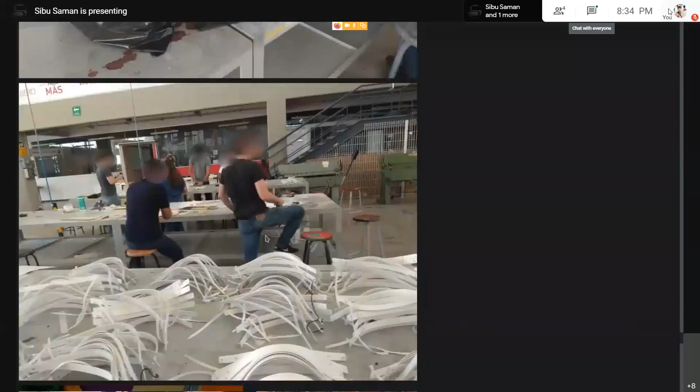So that's not very sustainable. With a lot of machines running just to create this face shield, it's not very useful. This is what we were doing in the beginning of COVID response. We were just creating millions of these face shields. Everybody was creating face shields. It did make sense in the beginning because face shields were in very high demand, and hospitals were out of face shields immediately, during the first month or first week of COVID.

What happened is, where we could step in to support COVID was, you see, during the beginning of the year there was a shortage of this material, and the manufacturers who traditionally make these kinds of face shields through a traditional manufacturing method, which is injection molding, it's going to be very cheap. For example, if one of these face shield clips cost say $1 for five of them, or $1 for one of them, it would only cost 1/100th if you do it via injection molding.

But in the beginning, the injection molding companies were not ready to create millions of these face shields. So there was a shortage of these, and it did make sense to supplement that shortage. But it didn't make sense to just keep on producing it.

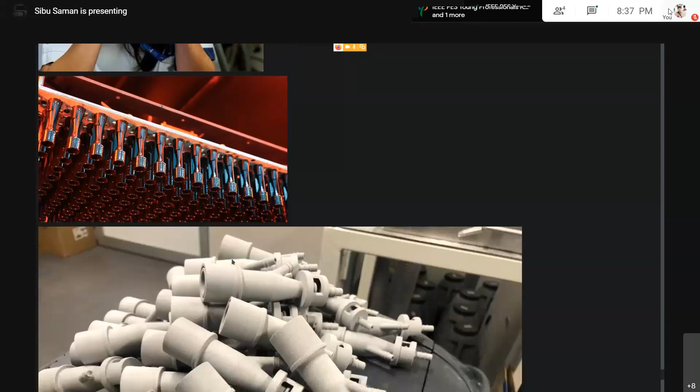So this actually makes sense, and they are actually mass producing the valves. Each of these valves actually costs a lot, but it costs very little to manufacture. And the manufacturer of these valves was not ready to sell them in mass numbers to the hospitals, and each patient requires one of these valves, and it was very expensive.

So what some of the hackers or makerspaces did is they reverse engineered these valves and started mass producing them. This was one of the useful things I saw, one of the things the 3D printing community did for COVID. We can create spare parts.

So if you visit nearby hospitals or other facilities, you will see that there is a lot of equipment just sitting there doing nothing, just because it has a broken knob or a broken valve, and the parts for these machines are not available, or it might have taken 1 or 2 months to ship during COVID, because logistics during COVID were broken, and it was very difficult to get the parts we required.

So in such a scenario, the 3D printing community can actually support the healthcare system or any other system, not just the healthcare system. Even if you go to local manufacturing units or any companies, most of them will have requirements for spare parts. And during COVID, because of the broken logistics, they may not be getting the spare parts, and the company is maybe sitting there doing nothing. They may not be productive, or maybe the hospital machines are not useful.